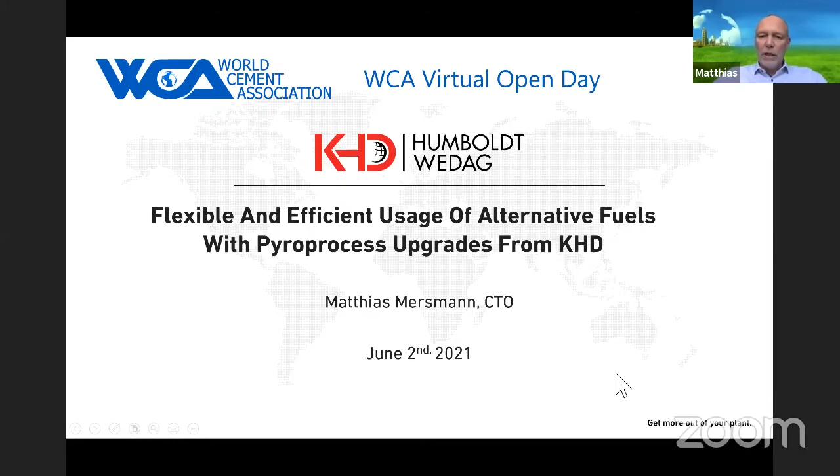For those of you who might not be familiar with KHD as a company, I'd like to give you a brief overview on KHD and especially what drives KHD. KHD is a company with 165 years of track record in bringing innovations into the cement industry, especially after World War II, when the modern times of cement production began.

KHD came up with a number of innovations into the industry which form the base of today's modern cement technology, beginning in the 1950s when KHD introduced the cyclone preheater that cut the energy consumption of clinker production by half, almost overnight. Then a series of other inventions have been introduced by KHD along the decades.

If I can now switch to my laser pointer, it would be easier for you to follow. For example, the calciner, which again reduced the energy consumption for the production of cement clinker. Then we came up with the short kiln. We came up with low NOx emission calciner technologies. We came up with highly efficient roller press grinding plants, all that with one target: to reduce the energy consumption, the cost, and the ecologic footprint of cement production.

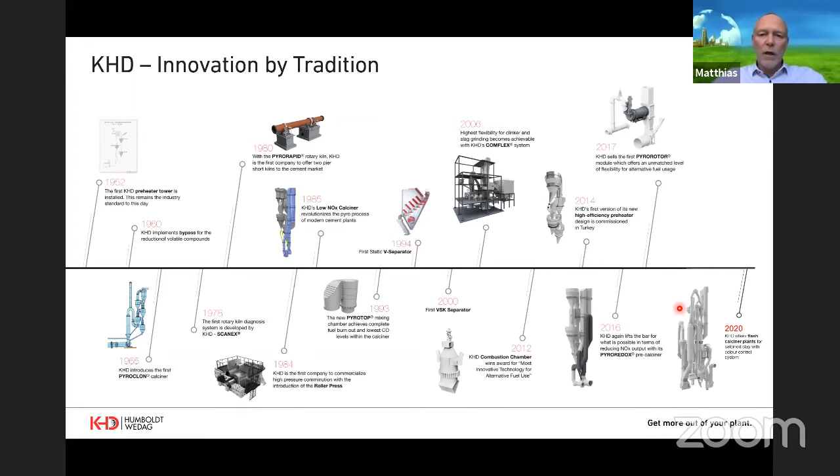However, let's put all that into perspective. I think the message has been delivered very clearly: there are pressing challenges for the cement industry. Like we've never seen it before in cement, we are confronted with a task that seems overwhelmingly big, and at the same time we have no time to lose. It's time to act now. The methodologies, strategies, and cooperation approaches needed have been widely explained by my prestigious speakers before me. So I'd like to get ourselves back into the first actual steps on how to follow these roadmaps.

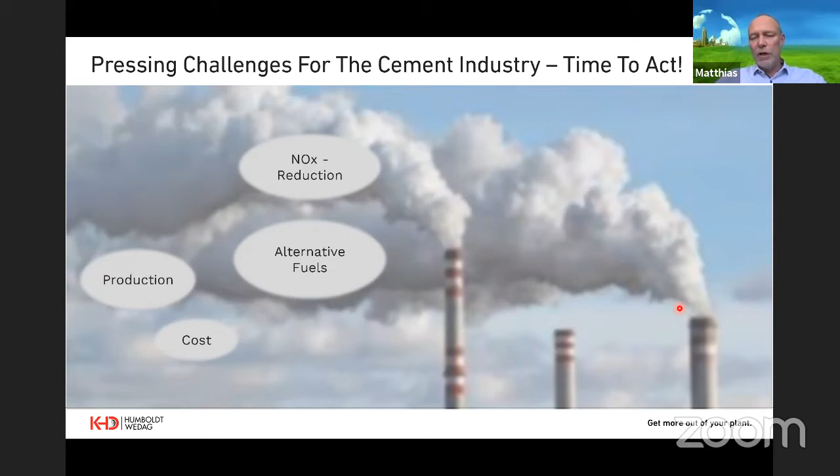Of course, the cement industry is always under production and cost pressure, given the relatively low price of this product. Then environmentally, we're going to talk about NOx reduction, mainly SOx also, and some other heavy metals, but NOx is a real big problem. Alternative fuels is a trend that is coming up very strong, and is also part of every decarbonization roadmap, and actually one that is able to save costs instead of increasing costs.

And the overruling topic of everything we talk about, and we're going to have to deal with for the next decade specifically, is CO2 reduction, of course.

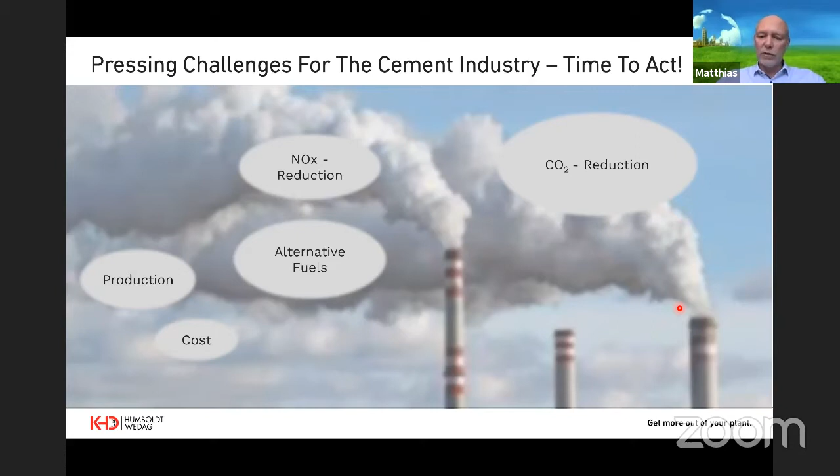There are several roadmaps that have been developed. I'm showing just a few here. For example, the roadmap of the German Cement Producers Association, that is showing the way on how to act to achieve carbon neutrality. And you're going to see it involves clinker manufacture, cement manufacture, logistics, and puts together a wide range of proposals to increase energy efficiency, to increase the use of alternative fuels, and to use hydrogen, to use CCUS technologies, for example. On the clinker and cement manufacturing side, we talk about new composite cements, reducing the clinker factor, using calcined clay, and all this.

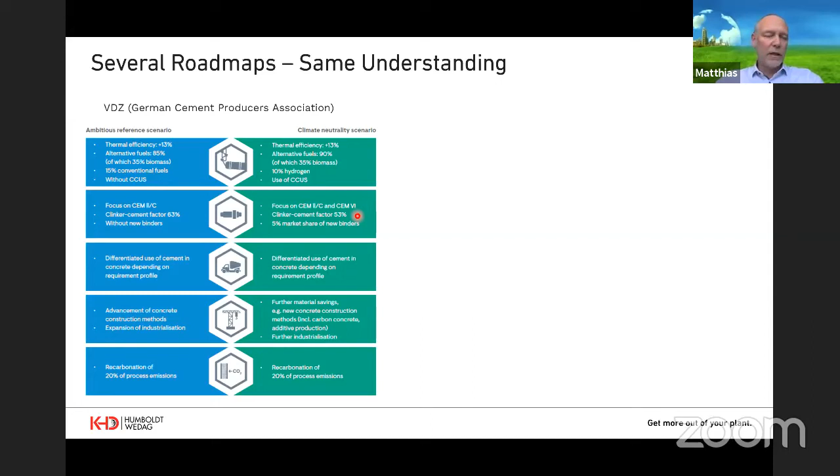Another famous roadmap for decarbonization was published by the International Energy Agency and the World Business Council for Sustainable Development. This compares the CO2 emissions permissible in the next decades in order to reach the Paris 2 degree goal. And it lists four levers which we have to apply in order to reach these ambitious targets.

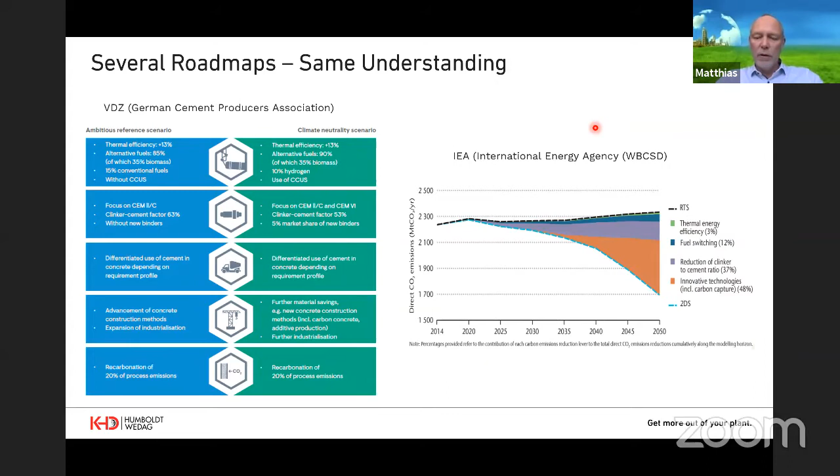And if you see here, you see that we are going to have to utilize the substitution of fossil fuels as one important lever to get to our targets. And that's why I say this is the first step towards the carbon neutral and ecologically sound cement industry.

If we switch over to China specifically, we see that there is a direct plan of the Chinese government that is being put in place, and that has massive investment and modernization implications for the Chinese cement industry. There's a plan for digital transformation of intelligent manufacturing in the building materials industry, and the requirements formulated here are very precise.

This action plan defines concrete targets for key parameters for higher energy efficiency and CO2 emissions reduction. First of all, there will be a benchmark to be reached in terms of heat consumption per kilogram clinker that is considerably low, at 670 kilocalories per kilogram.

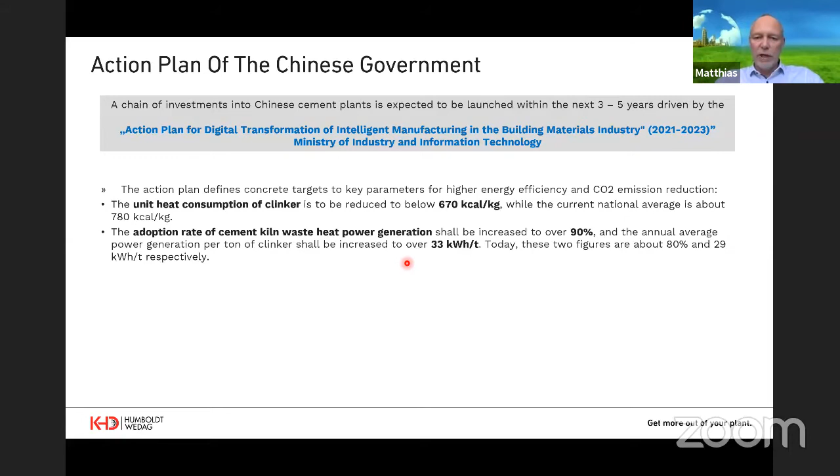Secondly, the adoption rate of cement kiln waste heat power generation shall be enhanced over 90%. Thirdly, the comprehensive power consumption to produce, say, special type of Portland cement shall be reduced below 82 kilowatt hours per ton. The alternative fuel rate, the thermal substitution rate, shall become over 15 to 20%. Currently, it is at 7%.

So you see, again, this is the first step towards decarbonization. Additionally, the production cost shall be decreased, of course, also by introducing smart technologies and zero pollution of the ecological environment for cement production. And that relates mainly to NOx reduction.

So I will address these points and show you what KHD can do to support you in this quest.

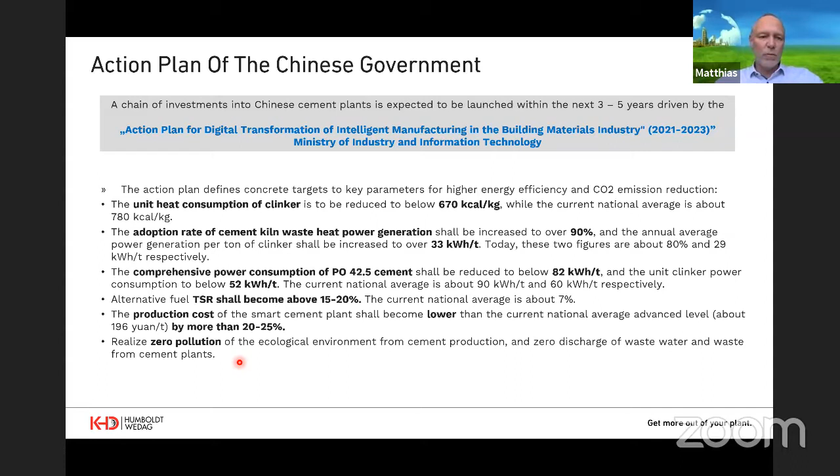The essence of it all: ever more stringent emission limits will be implemented. Technologies to reduce CO2 will comprise maximized utilization of alternative waste-derived fuels. Ever more energy efficient production technologies will be used. Clinker substitution in cement will call for grinding finer and more efficiently. And in the long run, carbon capture technologies are needed.

But as every journey begins with the first step, today we can immediately start going. And I'm not diminishing the necessity to start talking about decarbonization with carbon capture and calcined clay and oxy-fuel plants. But at the same time, we can start that journey through maximizing the use of alternative fuels. And we can start this journey by reducing our NOx emissions.

KHD is also involved in carbon capture and oxy-fuel projects. We are developing products for this, and we are talking to clients in concrete projects already now to set up pilot systems for these new technologies. And I think we are all clear on the same understanding: we have to bring up these pilot systems in this decade in order to have them accessible, ready for use on a wide scale, beginning of next decade, or we will be too late.

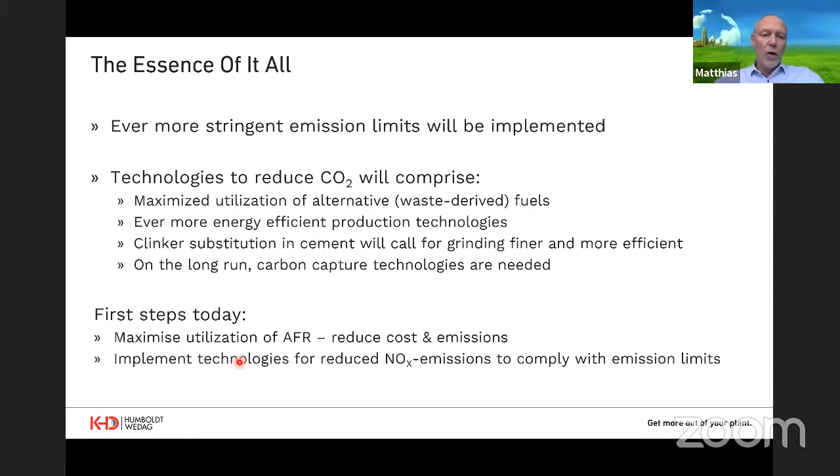Okay, my subject today, alternative fuel technologies. And why is that so critical? We tend to believe that alternative fuels are fuels, which in this case is true, but also not true, because these particles have never been fabricated to be used as fuels, which means they have properties which are not exactly ideal for combustion.

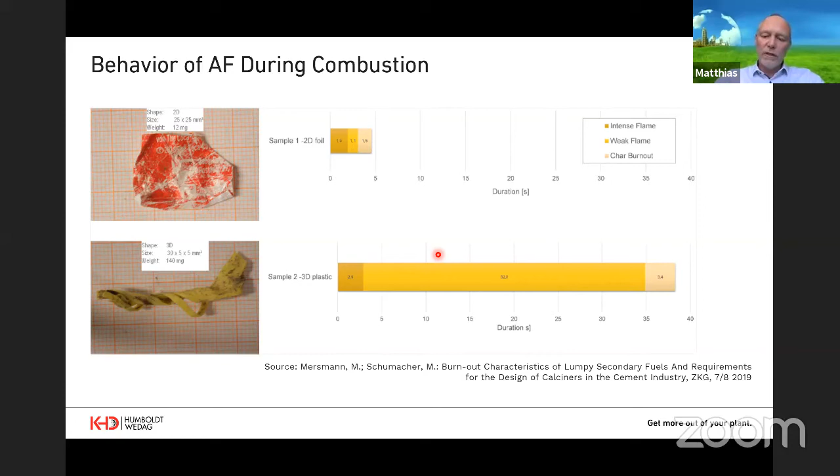And if you compare that to a coal flame or a fossil fuel flame, you see that the way this ignites and the way it releases its heat is completely different. And so the alternative fuel technologies have to take account of that. In order to do that, KHD has developed a wide range of technologies to use alternative fuels.

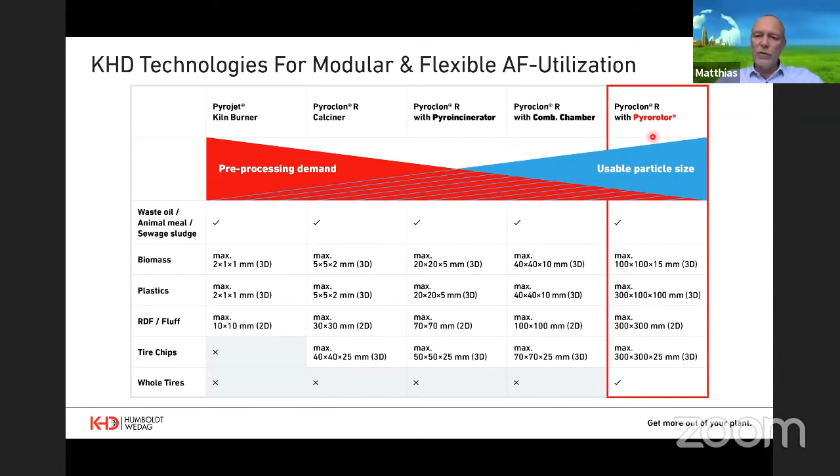On the left-hand side of this table, you see the most low-cost investment to start burning alternative fuels consists of introducing a pyrojet kiln burner, ready to use biomass, plastics, RDF, and fluff of a certain size. As this table develops to the right, you can see the sizes of these alternative fuel particles increase.

Up to the Pyrorotor that shows the biggest versatility for using even the biggest size of particles. Let me run you through the products very quickly. This shows the Pyrojet kiln burner, which is ready to take RDF and alternative fuels through its central tube.

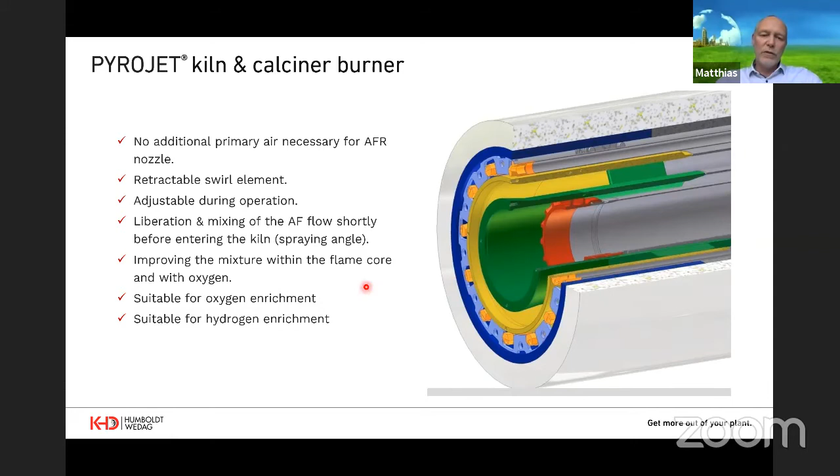It is also prepared to run with oxygen enrichment and hydrogen enrichment. Another module which we can flange on every flash tube calciner is the so-called Pyroincinerator, a very easy to flange on retrofit module that supports the ignition of the hard to ignite secondary fuels, boosting maybe 20 or 30 percentage points the firing rate of alternative fuels with a low investment.

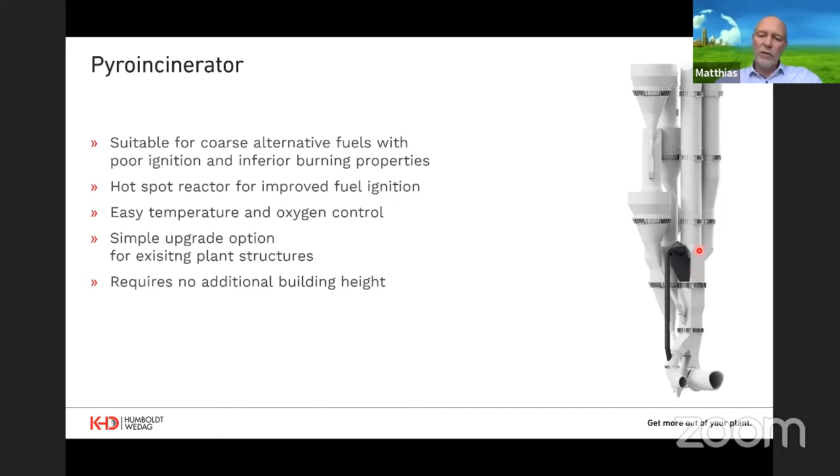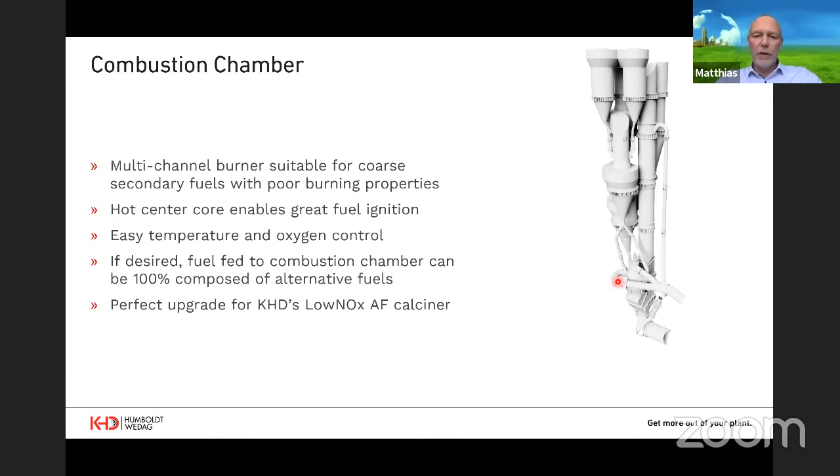Another module to be retrofitted is the so-called combustion chamber. I think that is a concept pretty well known already to many cement engineers. It's a separate reactor which features a real burner to produce a real open flame hot zone to facilitate the ignition of even harder to ignite secondary fuels.

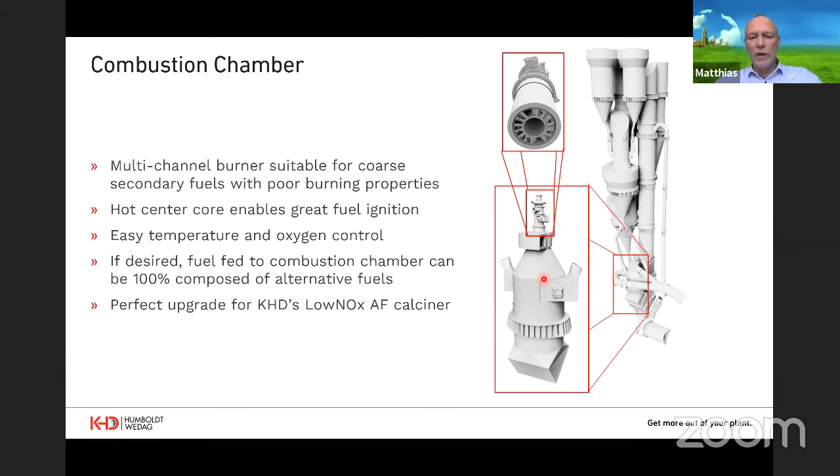The product I'd like to draw your attention to with a special feature today is the Pyrorotor combustion reactor. That's a new type of secondary fuel reactor, which consists of a rotary drum that provides many benefits for the combustion of secondary fuel. Its constant rotation provides new surface for the accessibility of the material to oxygen and hot zones.

There is no clogging, no sticking, as would be the danger for such very lumpy material combustion on grate systems. In systems where you have a fixed grate, sticky material can form agglomerations and disturb the whole process. This is not possible in the Pyrorotor combustion reactor.

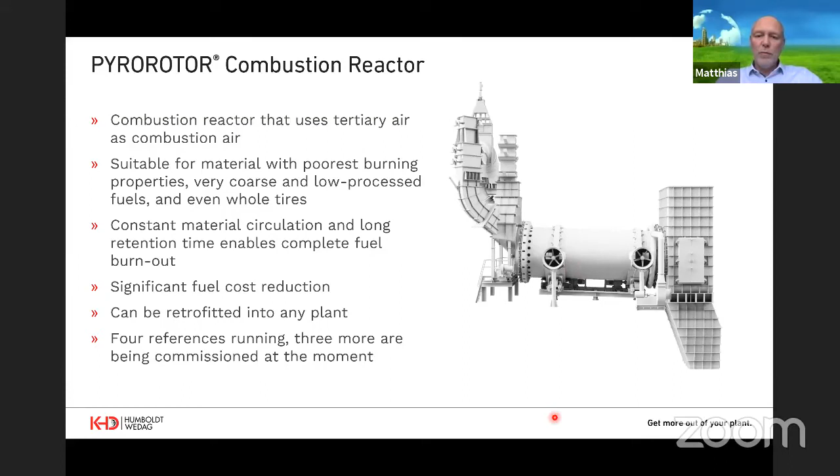Let me show you, I hope this works. Okay, the functional principle of the Pyrorotor, which you see here: it is supplied with some portion of the tertiary air, which we branch off from the tertiary air line. Then it releases its off gases into the calciner, where it mixes with the kiln exit gases.

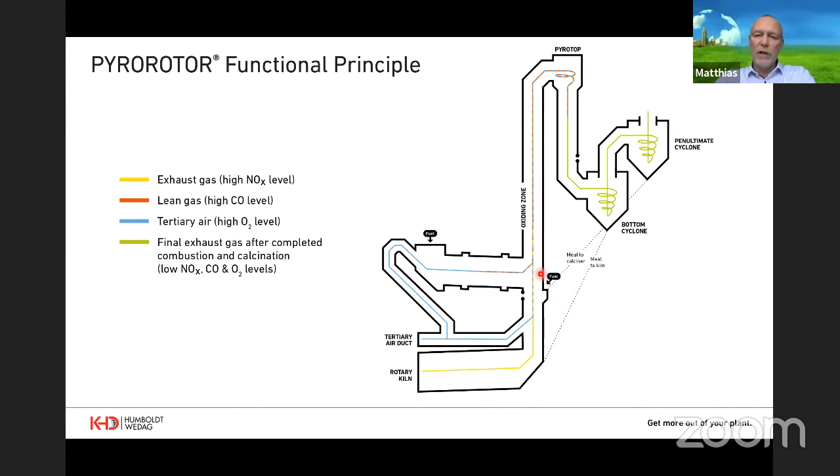We can play with the amount of oxygen we're going to offer for this combustion, so we can produce a lean gas that helps reduce NOx emissions from the kiln. So you can see it's a very robust design, a very simple process, and accordingly the market is accepting this product quite nicely.

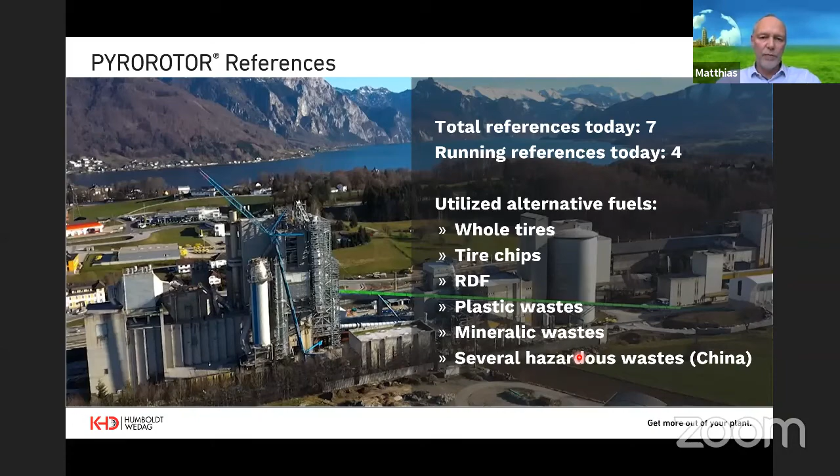We have sold so far 7 references, 4 of them running today, and the type of fuels we're using is very wide, containing up to whole tires. In China, applications with hazardous wastes are also running, which is very lucrative for the clients because of the gate fees they could get for this material. The Pyrorotor can fit in almost any environment as long as there's a tertiary air duct.

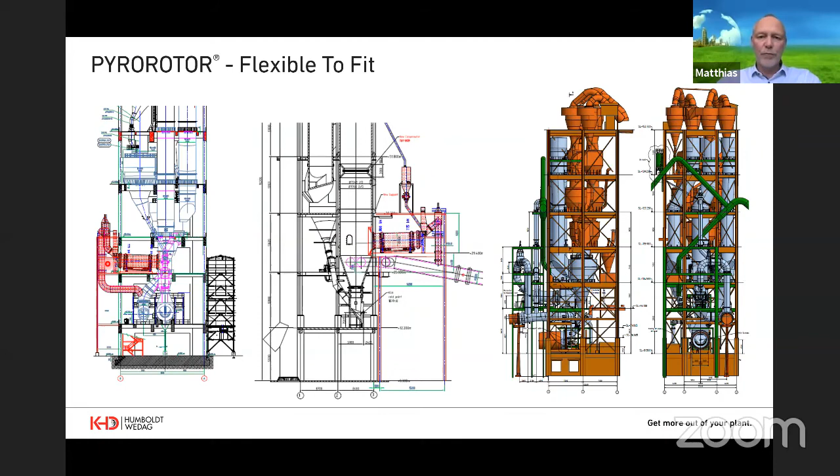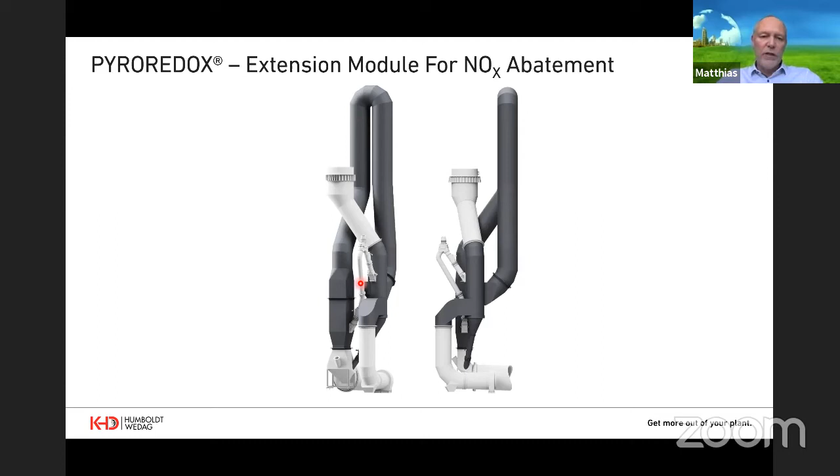For NOx reduction, we have developed the Pyroredox module, shown in dark gray in this picture. It's an addition to the calciner which allows reducing NOx emissions down to levels otherwise only achievable using high investment SCR catalyst technology.

Then the SNCR technology came up. When spraying ammonia and doing it right, you can reach levels of 200 to maybe 500 milligrams. Now the Pyroredox gets down to this level without using ammonia, which saves money and avoids ammonia slip.

And if we combine Pyroredox with SNCR, we get down to numbers comparable to catalyst installations, SCR installations. However, these require massive retrofits in the preheater and massive CapEx and OpEx investments, which is much cheaper to solve with the Pyroredox technology.

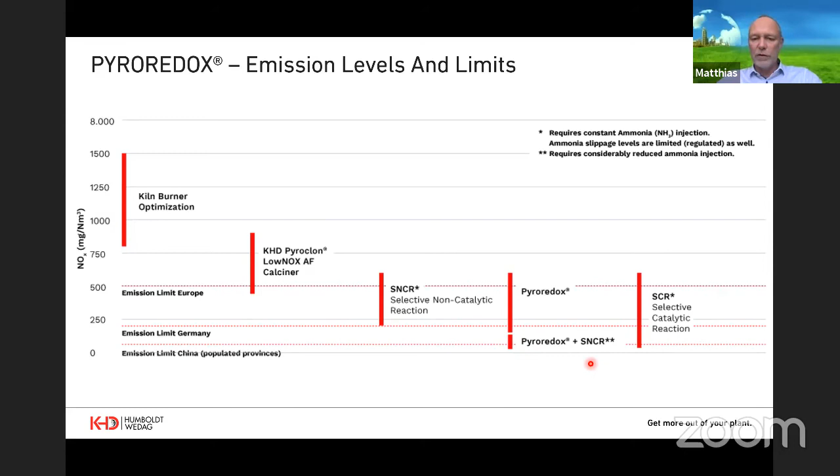Pyroredox acts like an upfront extension of the calciner, where we connect the kiln exit gas into this Pyroredox loop, and then later mix tertiary air into it and have the regular calciner. This simple process design allows for very efficient reduction of NOx in the kiln, and also provides a lean gas that is easy to ignite later downstream in the calciner loop.

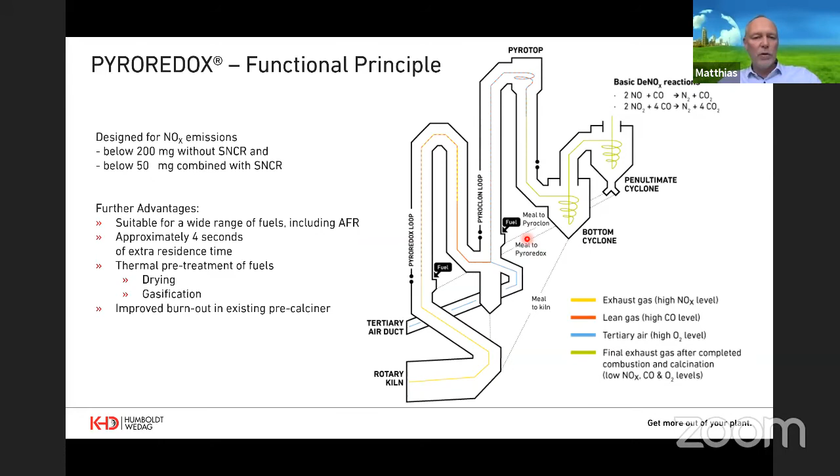Together with the Pyrotop mixing chamber, we dissolve all CO strands and run into the preheater system with a low NOx level and a low CO level. It is available for use with alternative fuel, and available with conventional fuel. It's a very simple and robust technology.

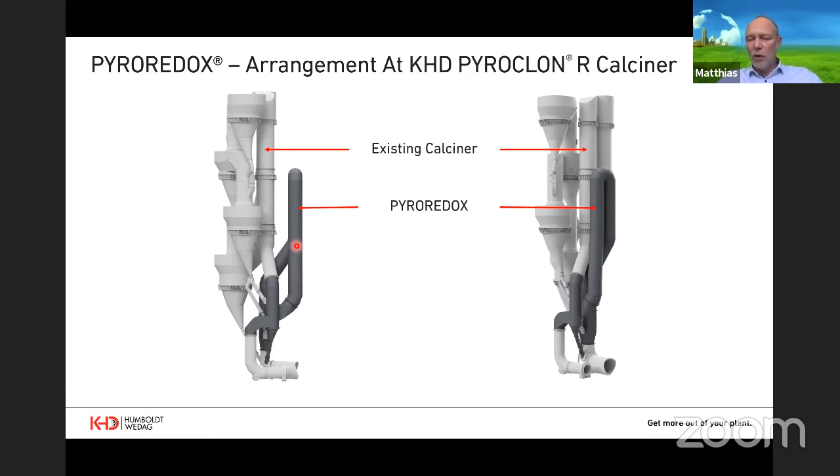You can see the retrofit of a Pyroredox in dark gray, as it is retrofitted into an existing calciner structure. It's a simple tube, not complicated, no moving parts, very simple to install and to operate.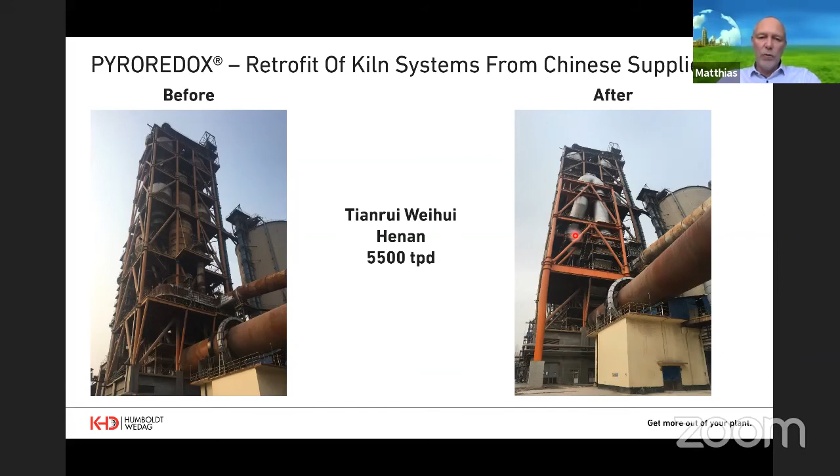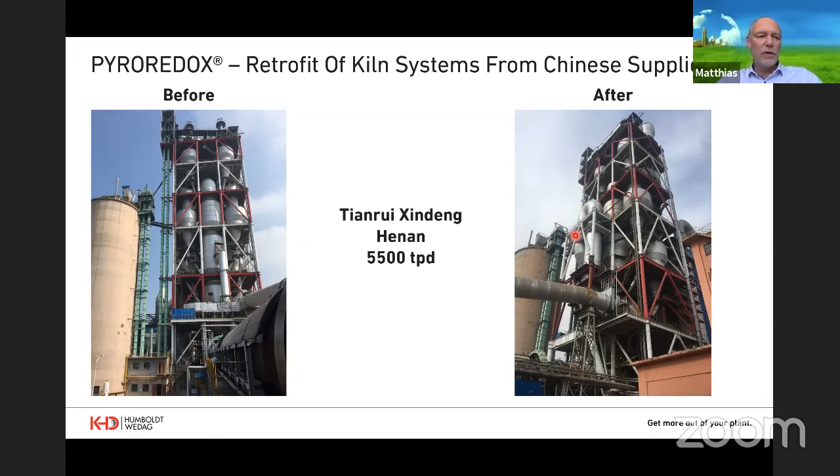You can see there is not much complexity involved, and accordingly we've done several more installations around the world, but very intensely in China because of that very stringent NOx limitation in China.

The size of the plant doesn't really matter. This concept works for all kinds of plants. I know that in China there's a strong differentiation always according to the production capacity of the plant, but process-wise it's all the same, and this principle works for all kinds of plants.

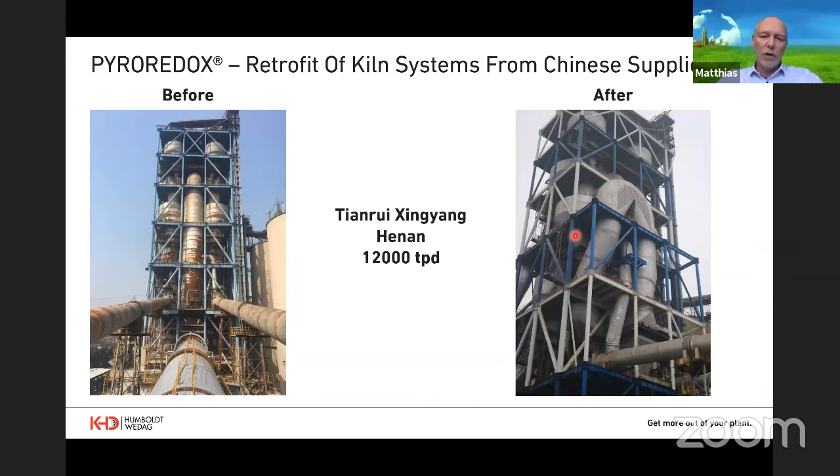The results I'd like to show you from some of these plants are very encouraging. For example, what I show here is the results and performance of the system after this initial commissioning. We have to get to a limit of below 50 milligrams here. At the first commissioning, we could already achieve a significant abatement of NOx below 100 milligram per normal cubic meter, or 50 milligram. I'll tell you the numbers in diagrams later on.

Also, the ammonia injection was reduced massively, as you can see, and this speaks for itself for the efficiency of this inherent NOx reduction. There was no reduction in plant capacity, no increase in fuel consumption, no increase in power consumption. That's a huge difference to the SCR technology.

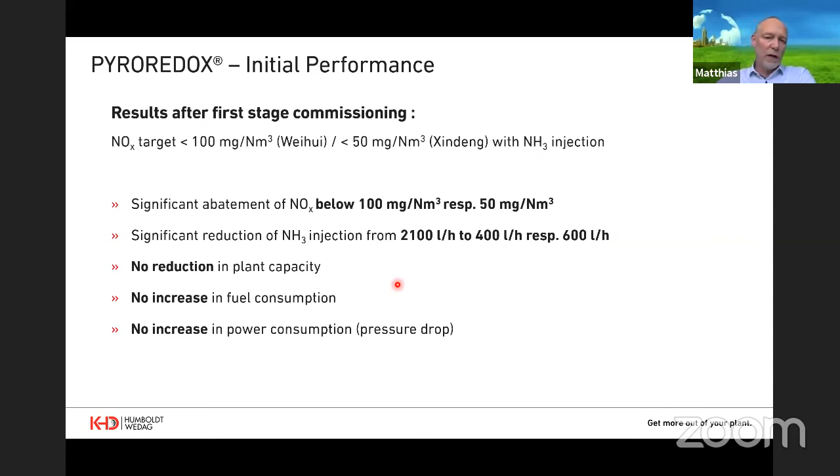If you look at the trends, they show you clearly what I've just mentioned. If you look, for example, at the green line, and the respective scale is here, that is the NOx emissions in milligram per normal cubic meter. And the yellow line is the ammonia injected.

And this could be improved further on. We put more fuel to the PYROREDOX, and we could reduce the ammonia injection significantly, as you see, while still the NOx emission was low. But this was only an initial commissioning.

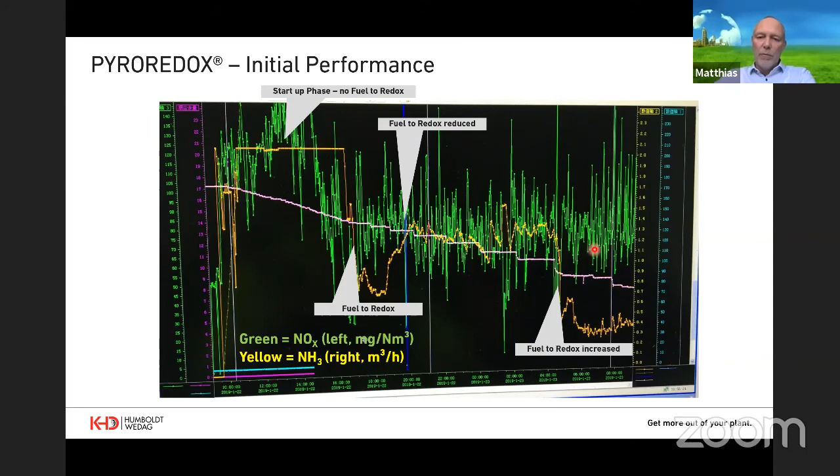We then optimized the plant, and I show you this picture here, which shows the NOx emission level in milligram per normal cubic meter as this blue curve. We also see the ammonia injection in this magenta curve. You see that we ended up with emission levels averaging around 26 milligram per normal cubic meter, with a very low ammonia injection in the range of 1 milligram per normal cubic meter.

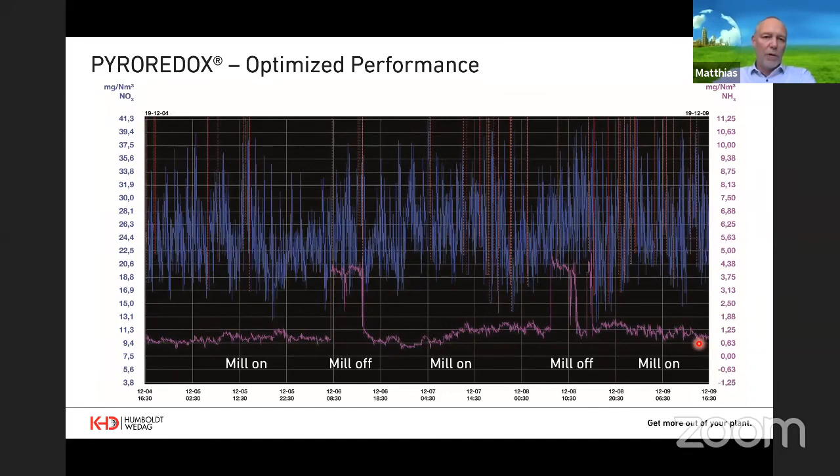So this underlines the powerful performance of this. We speak of an inherent integral NOx reduction by the PYROREDOX system.

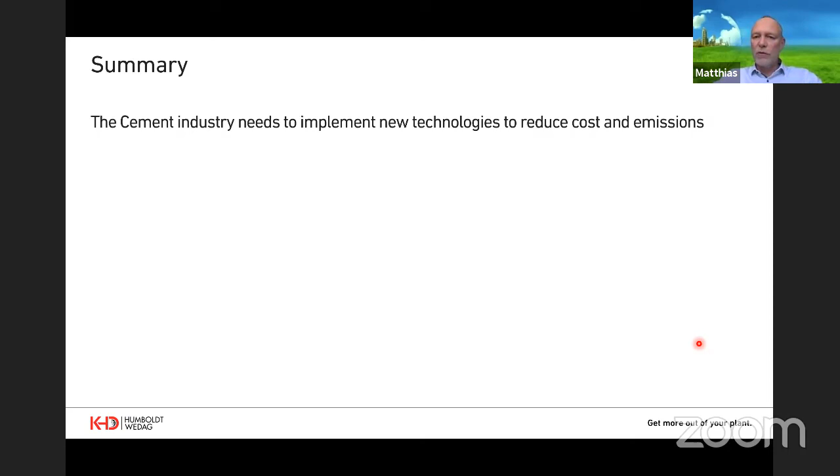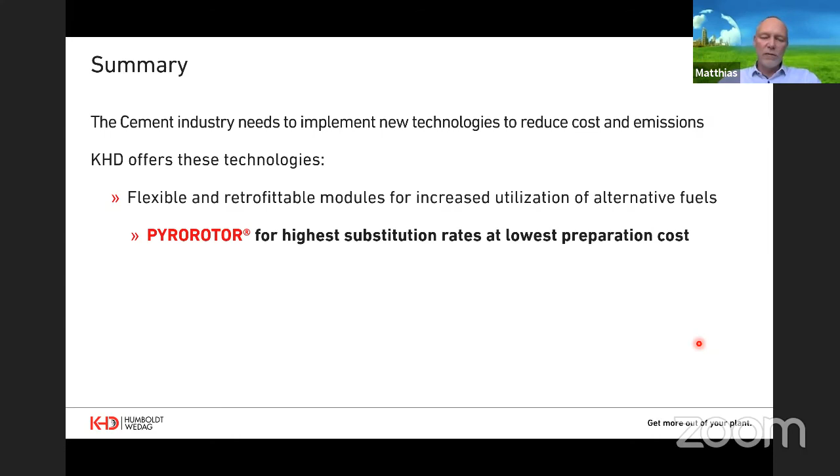And the top line product is the PYROROTOR for the highest substitution rates at lowest preparation costs, which means especially in cases where you don't have access to high quality pre-processed secondary fuel, but you have access to cheap, rarely pre-processed coarse size material, the PYROROTOR is the best solution.

And KHD offers also cost-efficient NOx reduction technologies. As an example, I've shown the PYROREDOX for lowest NOx emissions at low CapEx and OpEx.

And I'd like to close my presentation today with a saying from Master Confucius. He said, "He who does not care about the future will have plenty of sorrows very soon."

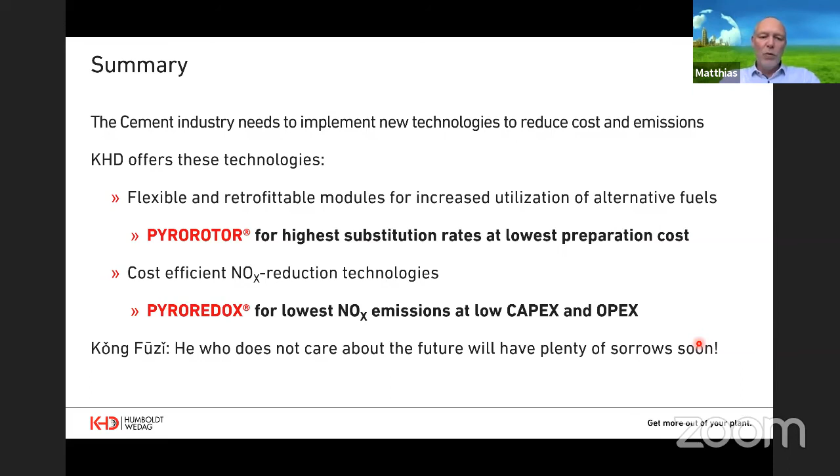I guess we all agree to this, and we all see the pressing urgency that we are in as a community. And we as KHD are sure we can achieve these goals only by very tight cooperation between clients and customers, authorities, research partners, and other industrial sectors. This is what we have to apply. We have to cooperate. And if we do so, I think we can reach the targets, but we have to get going. So let's get things done together.